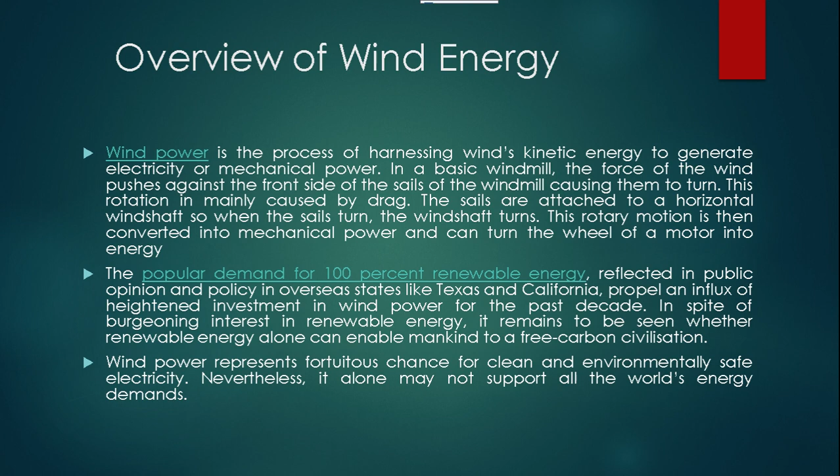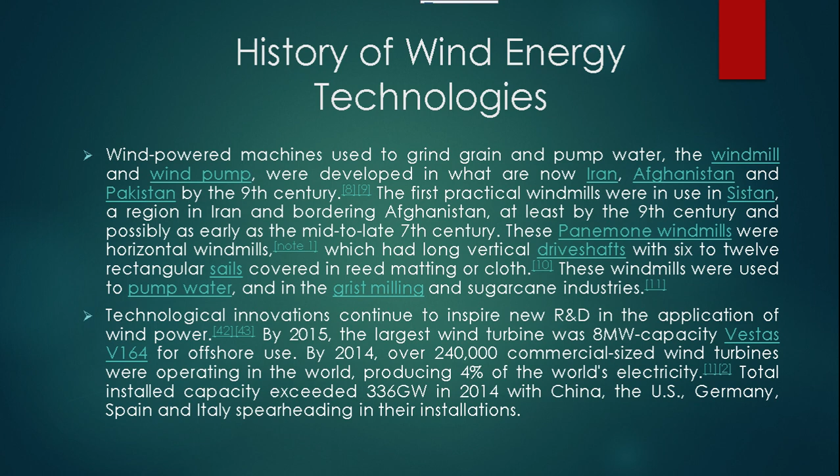Early in human history, we already had wind power, but mostly it was used for agriculture, for milling flour. Now we can use wind energy to produce electricity. Right now, the forefront of wind power technology is China, United States, Germany, Spain, and Italy. For Malaysia, we mostly use solar, hydroelectric, and coal, but the potential is there for Malaysia to apply wind energy, especially in windy areas like onshore or at sea.

The concept or principle of wind energy is simple: we use the kinetic energy from moving wind to rotate the windmill. The windmill rotates its shaft, and the rotation causes electromagnetic induction to produce electricity. From that electricity generated, we can store it or distribute it to any region for commercial, residential, or industrial purposes. Right now, the most popular types are horizontal axis and vertical axis.

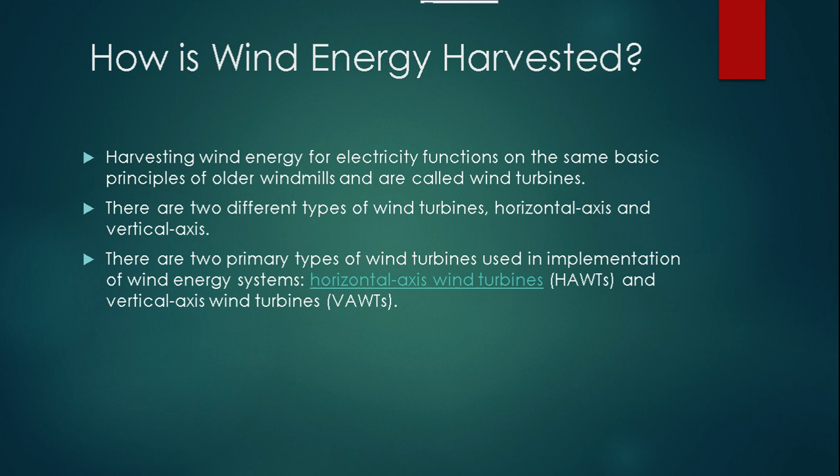In horizontal axis wind turbines, the axis of rotation or shaft of the windmill is parallel to the ground. Horizontal axis, or HAWT, is the most commonly used type, and they usually have a propeller with two or three blades.

For VAWT, or vertical axis wind turbine, it is different - the axis of rotation is perpendicular to the ground. It is unique because its design can harness wind from any direction, instead of needing the wind to blow in a specific direction opposite to it like horizontal turbines do, in order to rotate and generate electricity.

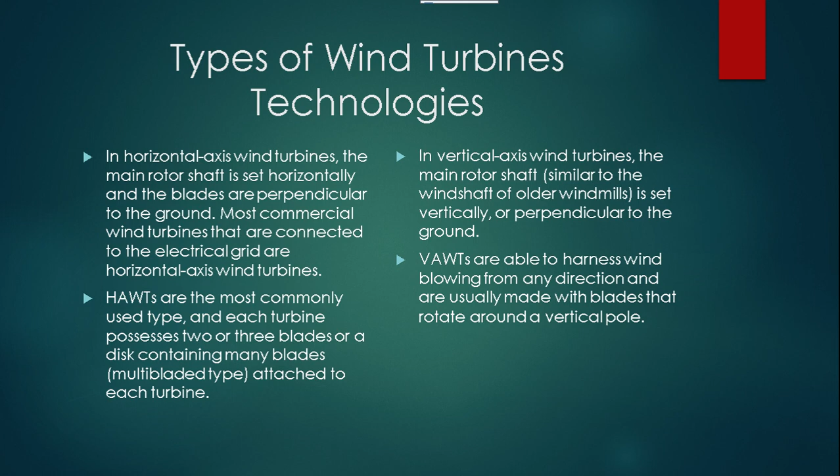Here is the common design for a horizontal axis wind turbine. It has to be constructed high, at least 100 meters, maybe 150 meters, to harness the strong blowing winds in the atmosphere. The design is always accompanied by a three-bladed propeller. Because of its construction, it can use or harness strong winds.

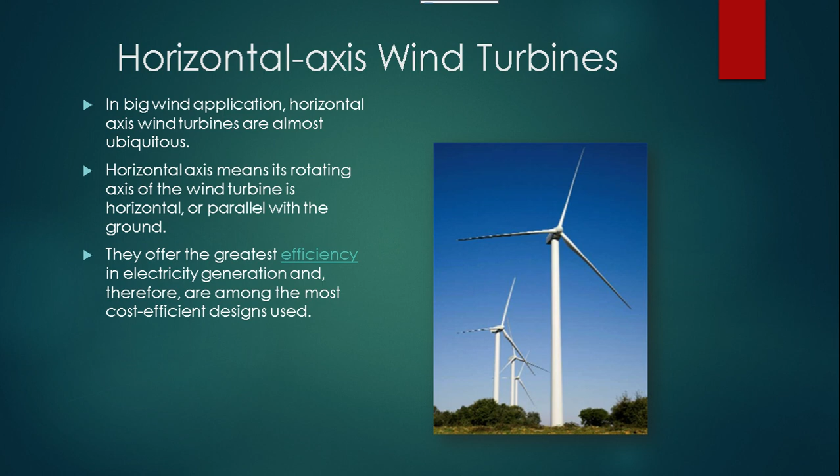The next type is vertical axis wind turbines. The axis of rotation and the design of the blades is very unique because it can be moved by wind from any direction. Sometimes it is called an egg beater design.

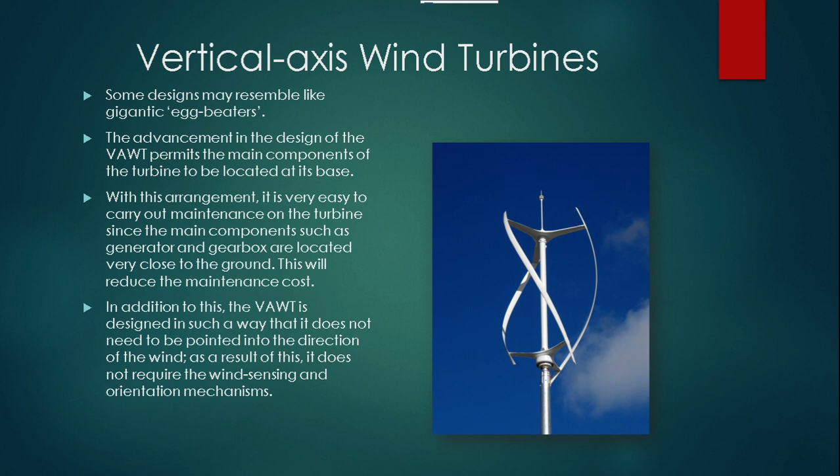Because of its design, the gearbox and any electrical components can be located at the base, meaning that instead of being constructed hundreds of meters high, technicians can service and maintain its necessary components at ground level. Because of its design, it does not require any complicated design like wind sensing or orientation for its blades to follow the wind direction.

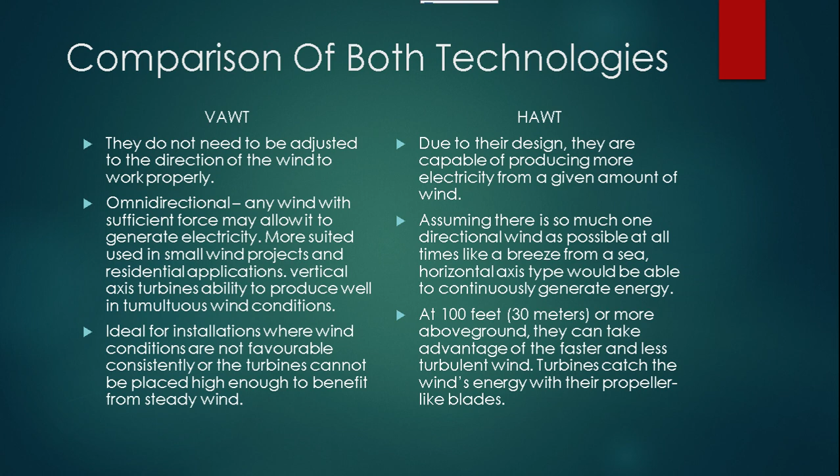As I said before, for vertical turbines, it does not need to be adjusted to direction. It's ideal for regions with no definite or consistent wind direction. For horizontal turbines, if you want to maximize the generation of electricity, you should use a horizontal one.

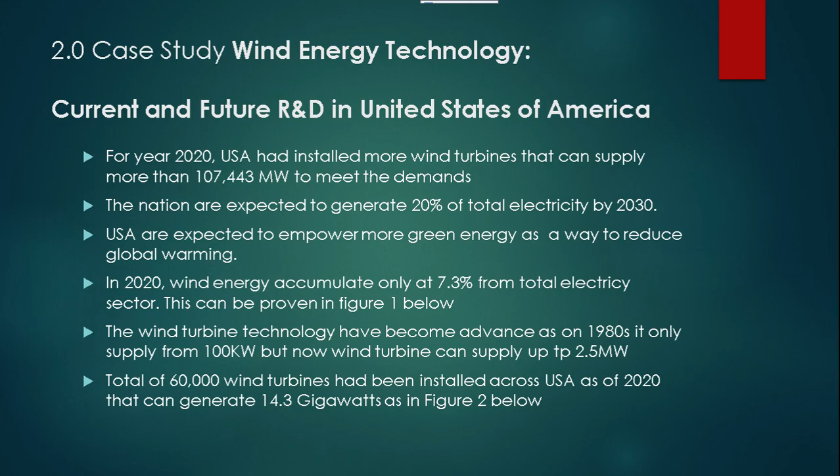In figure 1, we can see the United States utility-scale electricity generation by source, amount, and share of total in 2019, by the end of 2019 and the start of the first quarter of 2020. From the utility scale data, wind power amasses only 7.3% of total electricity, and this will increase towards 2030 so that the USA can achieve 20% of total electricity from wind energy.

In figure 2, we can see the chart of US wind capacity by initial operation year from 2010 to 2020. The dark blue represents operating power, and the bright blue represents planned power generation. For 2020, they plan to generate more than 14.3 gigawatts, and more wind turbines will be installed to meet the projected plan.

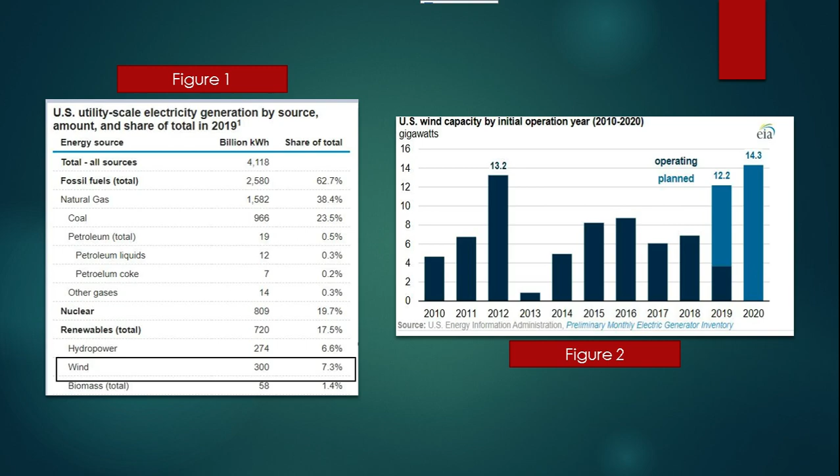Next, future wind energy research and development in the United States. Many private companies and the US government cooperate through research and development, usually via AWEA, the American Wind Energy Association, to research ways to make wind turbines more efficient and generate more power.

For example, over the years they have been researching ways to make wind turbines more robust and require less maintenance. For offshore wind turbine plants, since they are placed above seawater, they are prone to corrosion, so they must be designed to be more robust and require less maintenance, as costs become higher due to transporting maintenance crews from land to offshore plants.

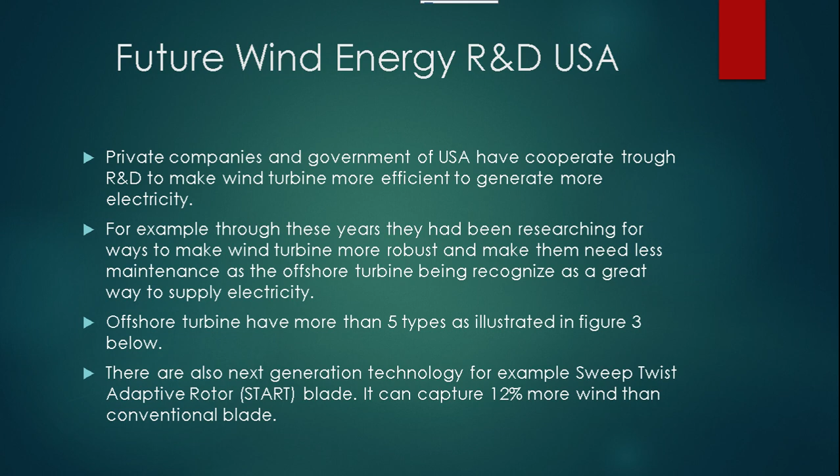For example, they can float the offshore wind platforms using a spar buoy, tension leg platform, or semi-submersible platform, as we can see in the example in the next figure.

Besides, offshore platforms have more than five types. For example, one is the monopile, usually located near the shore in less deep water. For deeper sea bottoms, there are three types: monopile, four-legged jacket and tension leg platform. For depths above 60 meters, there are two kinds: spar buoy and semi-submersible.

Besides, there is next-generation wind technology currently being innovated and researched with the help of the Wind Energy Technologies Office (WETO).

They have helped facilitate this next generation of wind technology through development of longer, lighter rotor blades, taller towers, more reliable drivetrains, and performance optimizing control systems.

WETO has worked with other industry partners to develop an innovative wind turbine blade that has led to an energy increase, capturing wind energy more than 12% better than the conventional blade. The blade is called Sweep Twist Adaptive Rotor, or STAR blade. The blade is shaped with a curve at the tip to take maximum advantage of wind speed at higher or slower speeds. We can see this in the figure example.

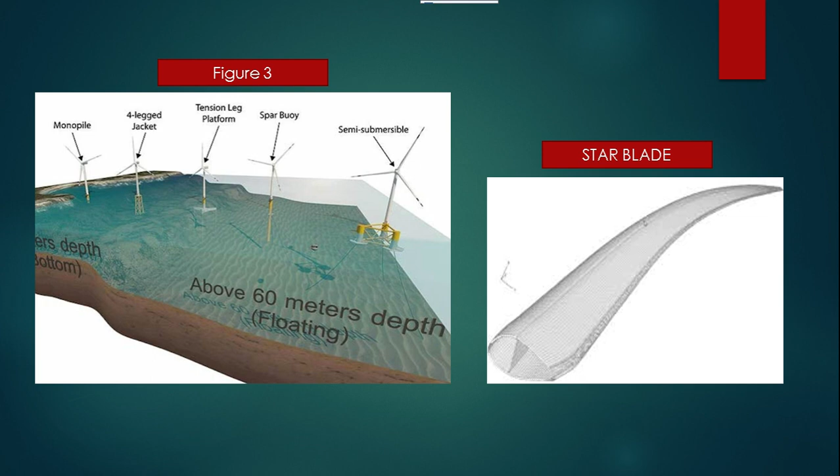To implement the system in Malaysia, we know that Malaysia is not well known for producing electricity by wind harvesting because the majority of towns in Malaysia only get an average of about 1.8 meters per second of wind speed, and the wind speed does not blow uniformly.

Malaysia's demand in electricity by 2020 is expected to reach around 124,677 gigawatt hours. So if wind power is made to supply 10% of this projected electricity use, the total land area of Malaysia needed for windmills is around 18,977 square kilometers. This area is equivalent to 6% of the total land area of Malaysia, or equivalent to over 1.2 million windmills to be set up.

Currently, it costs about only RM1 for every 1 watt of electricity generated from wind energy in Malaysia. So to meet 10% of Malaysia's electricity demand in 2020 would cost approximately RM1.4 billion to set up.

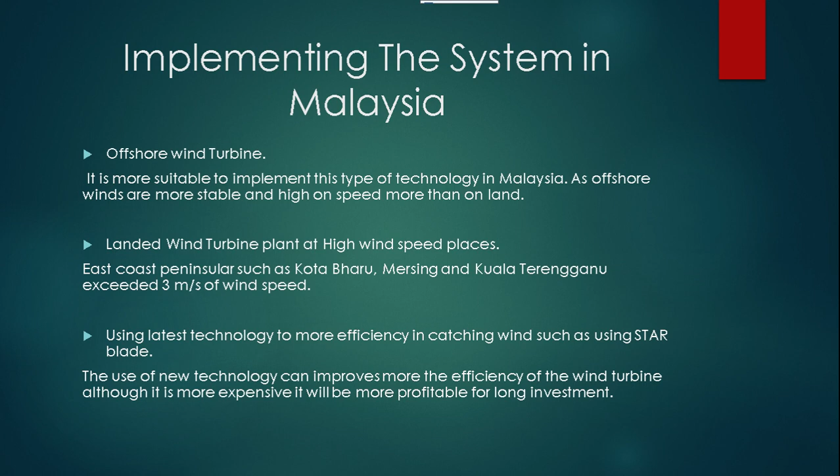From market analysis, Malaysia's electricity demand by 2020 is expected to reach 124,677 gigawatt hours. So by doing the calculation that has been researched, we found that the total area needed to accommodate the windmills is 6% of the total land area of Malaysia, equivalent to 1.2 million windmills to be set up. This would cost around RM1.4 billion to set up the required number of windmills. This figure shows that it is possible to harness wind energy for electricity generation in Malaysia.

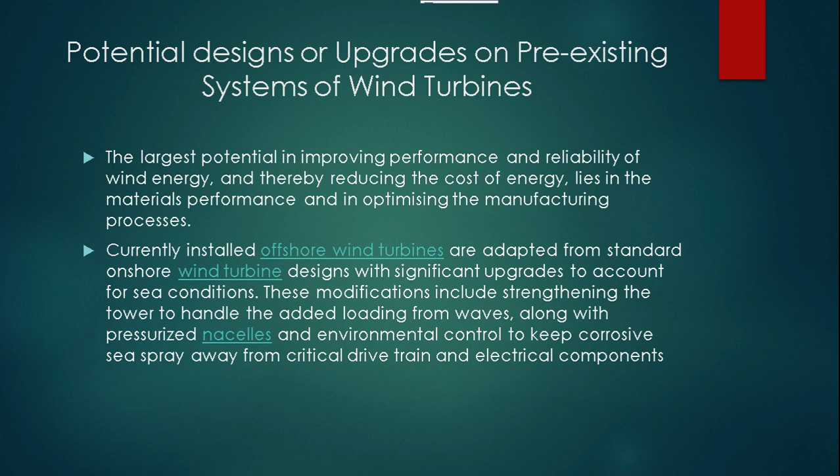For the first point, wind turbine material. Commonly we use materials like high modulus fibers, such as glass carbon fiber, so that they can be sturdy and resilient.

But the problem is at sea, the salt content is very high, such that if you construct it with normal alloy or metal, it will cause rust, especially if the material has a high content of iron. So the main threat to wind turbines at sea is salt content. We must select a material that is very resistant to salt and rusting.

And the next point is to be on the safe side, because we construct our structure at sea, we must use materials that are environmentally safe or green, like wood, bamboo, or coco flax, things that are very safe for the environment, especially for flora and fauna, for sea life. Even the resin used to construct the bearings or connections or joints of the wind turbine must be from environmentally safe substances.

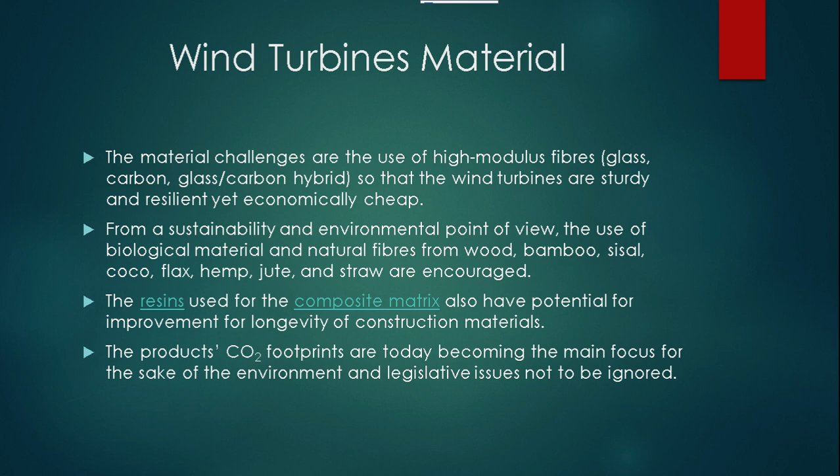Okay, the placement of wind turbines. Normally we can get 2 to 5 megawatts, but the further the construction of the wind turbine from the land, the higher it can get, and we can construct wind turbines high enough, from 80 meters to 150 meters. Because of offshore placement, we can use more complex designs.

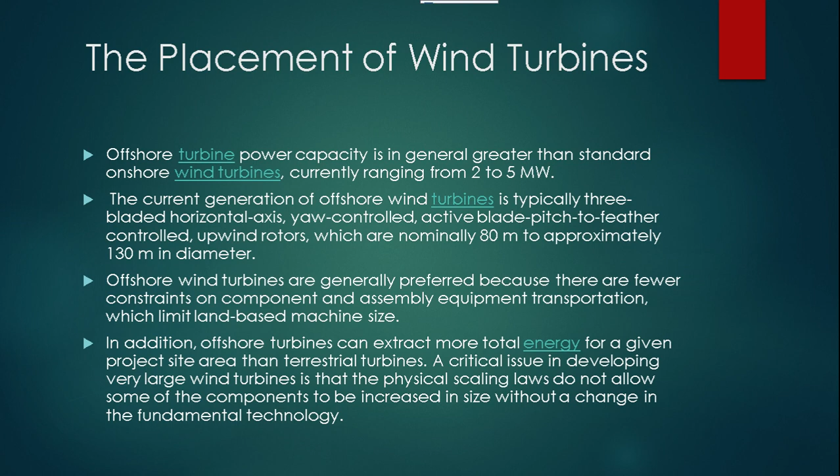In addition, when we construct wind turbines offshore, the design can be larger than usually constructed near residential or industrial areas. Next slide.

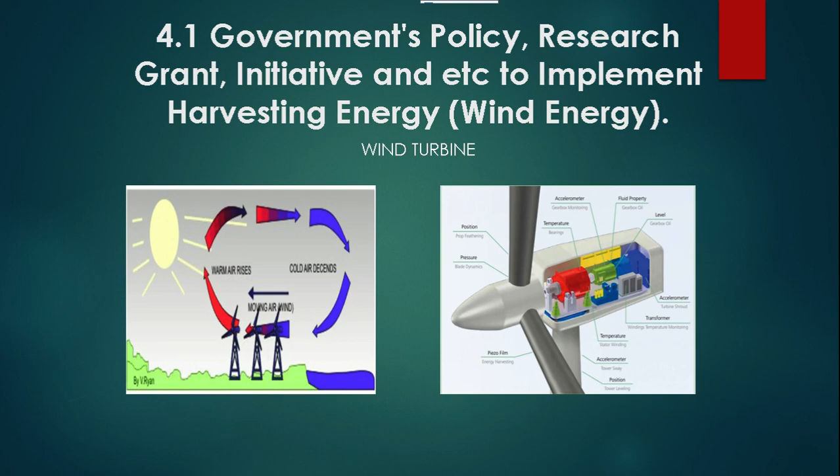As is well known, Malaysia is one of the potential places for wind turbine energy, especially offshore. This is because wind blowing from the South China Sea normally occurs during the monsoon season from November to February, especially in East Coast states.

So we can see that a potential place like Perhentian Island is very suitable to develop a wind turbine. Okay, next slide, please.

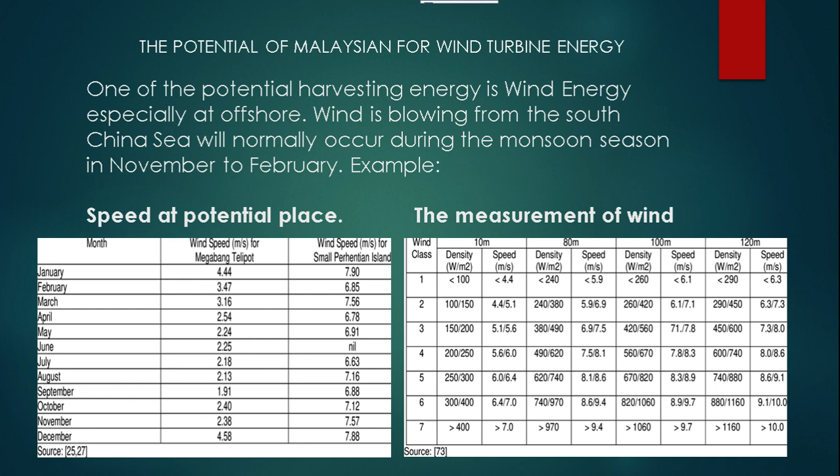The aim of Malaysia wind turbine is to increase national capability for innovation in green technology and development, to ensure sustainable development and conserve the environment for the next generation, and to inform people about the importance of green technology and its widespread use.

Malaysia is one of the most developed Asian countries. According to the estimation of the International Energy Agency, they target 53% of global energy consumption to come from harvesting energy. Malaysia is one of the most developed countries also involved in expanding harvesting energy, and one of these harvesting energy sources is the turbine.

Next slide: wind turbine project and collaboration in Malaysia. We all know that the previous government of Malaysia already had the initiative for an ETC project. Firstly, we can see that a 150 kilowatt turbine was developed at Pulau Terumbu, Sabah in 1995.

Then, a second project was a 100 kilowatt turbine hybrid with 100 kilowatt solar PV and 100 kilowatt diesel at Perhentian Island. And third is a 3 kilowatt turbine at Setiu, Terengganu. As mentioned before, East Coast states like Terengganu have great potential, especially offshore. A study conducted by University Malaysia Pahang found applications for wind turbine supply electricity, which is expected to help farm industries with high operation costs.